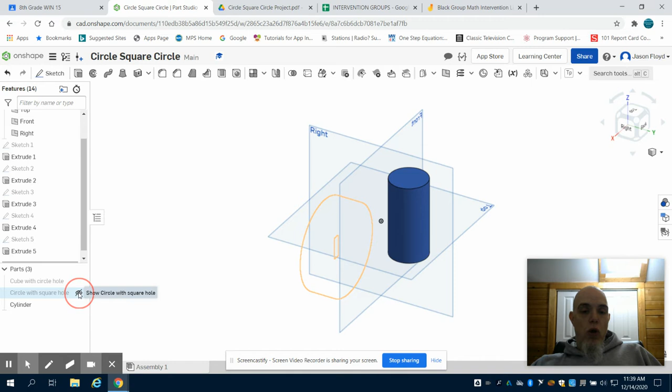Going back to OnShape, where we left off last is we created our cylinder. I'm going to show my other parts now by clicking on the icon, and what we're going to see is we have our 3 parts created. If we go down to the bottom toolbar, we can see where it says Assembly 1. We're going to click that and change our workspace.

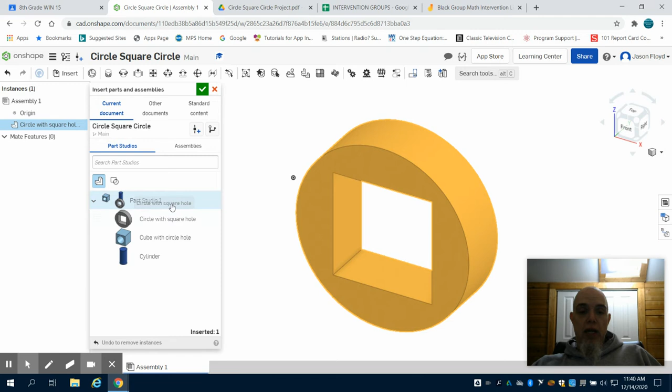I'm going to come over to the Insert button, and you can see all those parts I created in that studio are now here. The reason that we named them is so we could have an easy way to identify them. The first part I'm going to bring in by clicking on there and then coming into my workspace and left clicking again is my circle with a square hole.

I'm going to hit my green check mark to close this insert window out, and I'm going to right click on this part. When I right click, you should see the word fix, and what fixing does is it pins that part to our workspace.

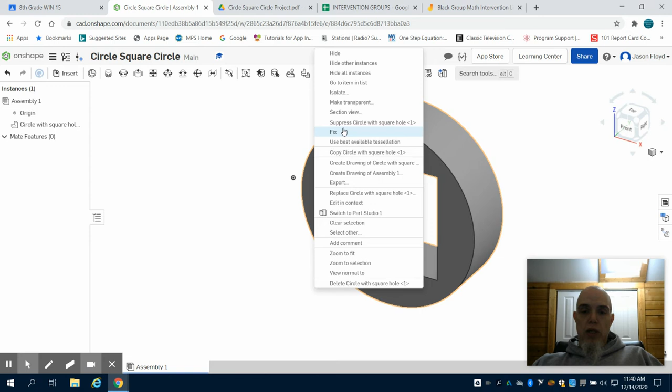Our workspace has no rules like our three-dimensional world we live in, so we have to set the rules for our parts in this assembly file. I'm going to set the first rule by just fixing our first part. What that basically says is all our other parts will revolve around this part, because this part is pinned.

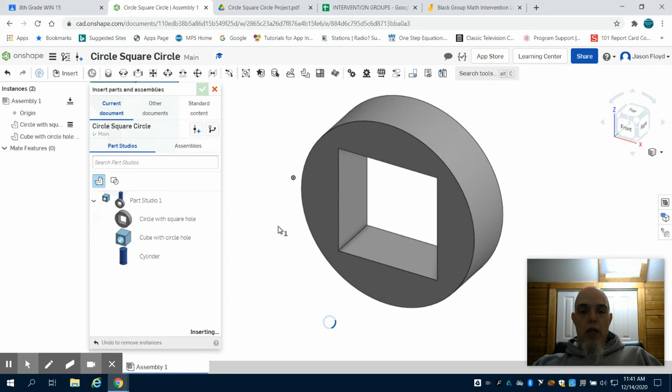I'm going to come back to my insert button, and I'm going to grab my cube with a circle hole to it. I'm going to left click in my workspace and hit the green check mark. What you're going to notice is with my select button, I can move this part, but this part is fixed on those sets of planes.

So what I want to do is join these. Now there's 2 ways to do it. We can join them together with a fasten mate, where we can set 1 rule to join the 2 parts, or we could do it with planar mates, where we would have to set 3 rules to join our parts.

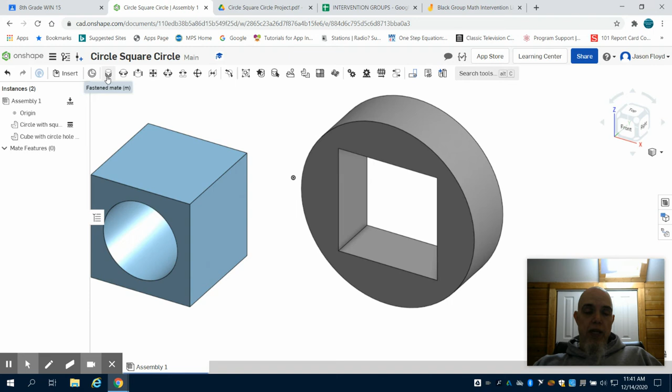So we're going to do the fasten mate, and I'm going to click on my fasten mate. I'm going to move this off to the side. I'm going to choose the top center of this piece, and I want to join it or fasten it to the top center of my opening. What that's doing is it's setting a geometric rule that those parts will be joined together and cannot rotate at that point. I'm going to hit my green check mark to finish.

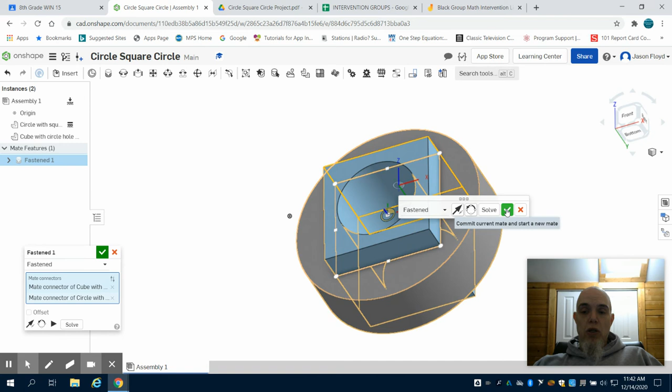I'm going to close out my fastening. And what we're going to notice is I'm going to try to drag this, and I can't move it now because these 2 parts are joined and the original circle part is fixed or pinned at that point.

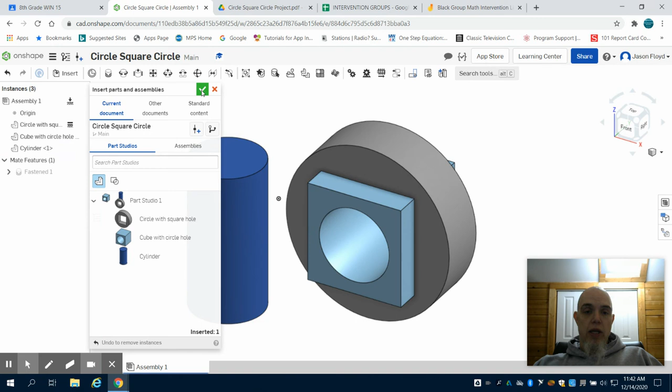I'm going to insert my cylinder now, left clicking to bring it in, and green check mark to close this menu out. I'm going to come back to my fastened mate, and what I want is the center axis of that cylinder, and I want the middle of it.

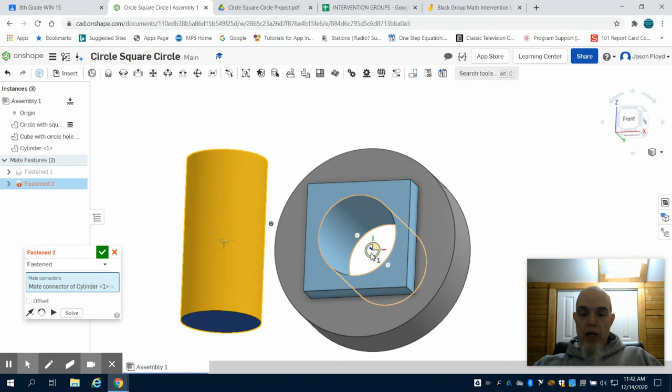So I'm going to click on that point, and I'm going to go to the center point of my hole as well. I'm going to fasten it at that point. We can see over here in my fastening, I fastened at those 2 points. I'm going to green check mark, and now I have created my part according to my specifications.

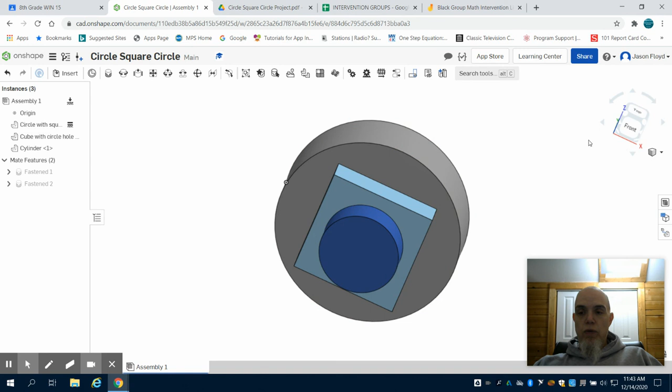The thing that we'll notice is all the parts cannot move because they are joined together with those geometric rules.